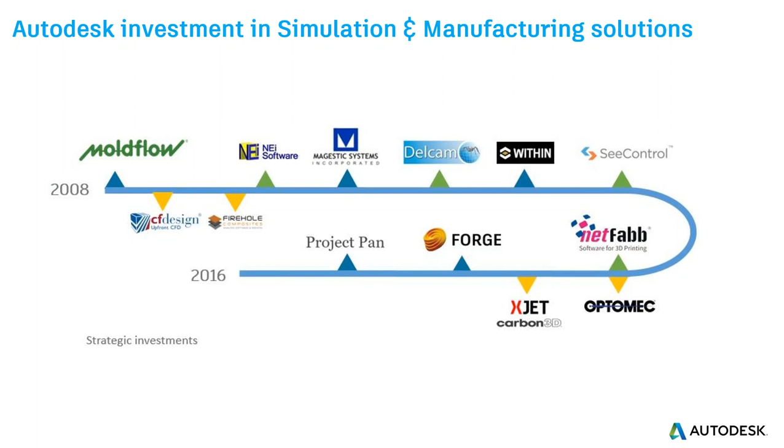Two of the acquisitions, key acquisitions for looking at mold tooling, the injection molding process, are Moldflow and Delcam. Moldflow was established in 1977. It's a key brand name in the injection molding simulation world. And we also have Delcam, one of the world's leading suppliers of advanced CAD/CAM software for the manufacturing industry. They were also founded in 1977 after initial development work at Cambridge University, and they've been growing ever since.

So high volume production can take the form of injection molding for plastics. It's a very competitive area, and there's a lot of pressure on pricing, which can squeeze margins from any project. So differentiation into higher value business to address the needs of complex and more accurate tooling helps to regain a competitive advantage through use of new technologies and increased machine utilization. This is becoming more important for the mold industry as designs become more complex and critical mold tool design questions need to be answered early in the manufacturing process before they become expensive.

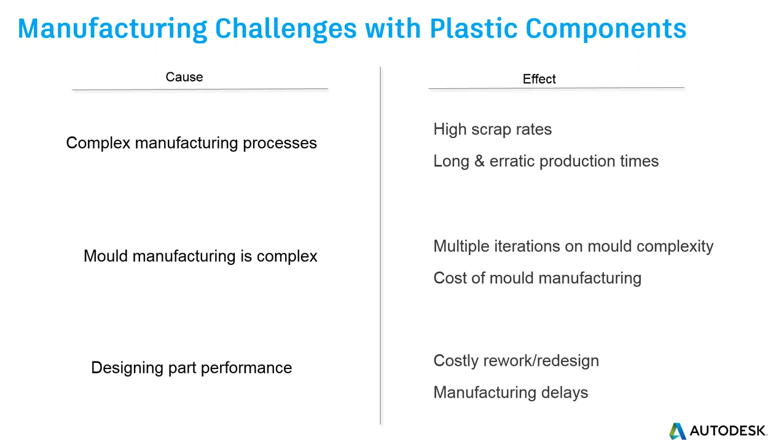If we look at the optimization process, this starts in the design phase, where we can start to optimize part design, mold design, and any changes at this stage are relatively inexpensive, and this helps to keep costs low during the process. So there is no need to validate. Once you get into production, you already know what to expect. You know that things will work first time.

So information can be passed on from design, engineering, prototyping, and manufacture. This means less changes are required. We can identify issues very early on. They can be eliminated at that stage, and there's no need to make major changes downstream.

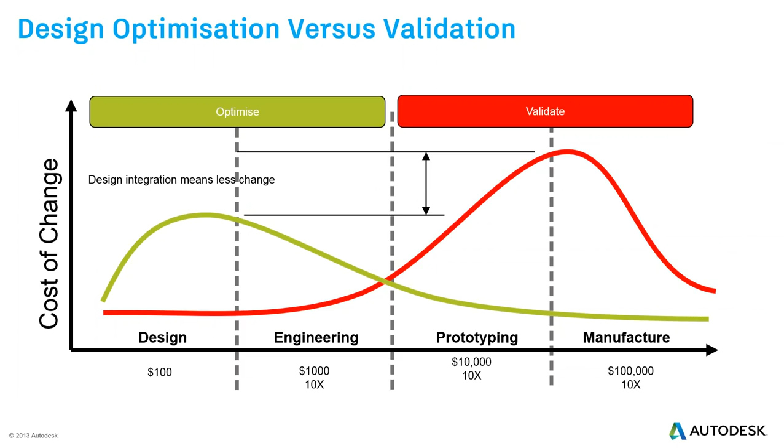So it is a multi-stage development process. We look at the objectives of what we're trying to do at the top and the risks at the bottom. On part design, we want it to be suitable, to be fit. There may be structural requirements, but can we actually make the part? Will it be to the correct size? Once we get into mold design, there's tooling features we can do, such as cavity core design, cooling, ejection, gate and runners.

But how do we know that the cooling design is optimized? It's going to give you uniform mold temperature. Is the feed system design going to give issues? Where should you vent the tool? Once you start cutting the mold, you can define tool paths. But are these optimized tool paths? Are they going to give you the risk of interference?

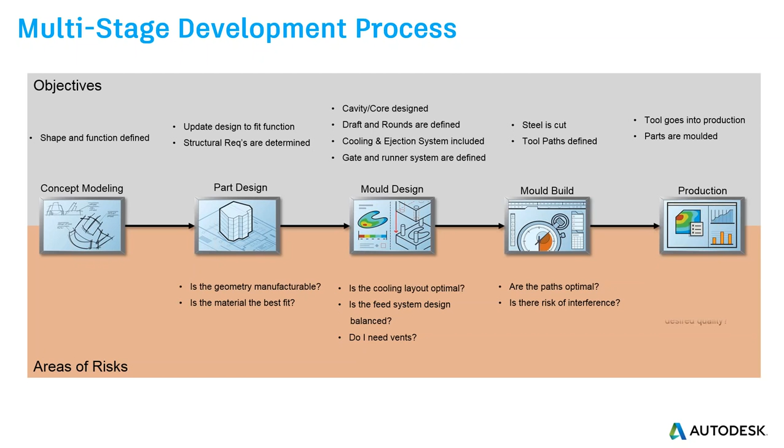Once you go into production, you're molding parts. How do you know the mold will perform? And will the parts be accepted? Will they be of the desired quality?

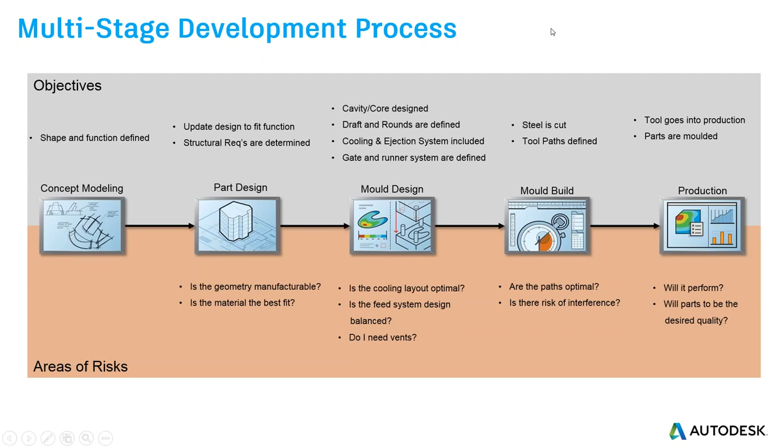So we can look at this another way. We can look at the stages that we typically go through.

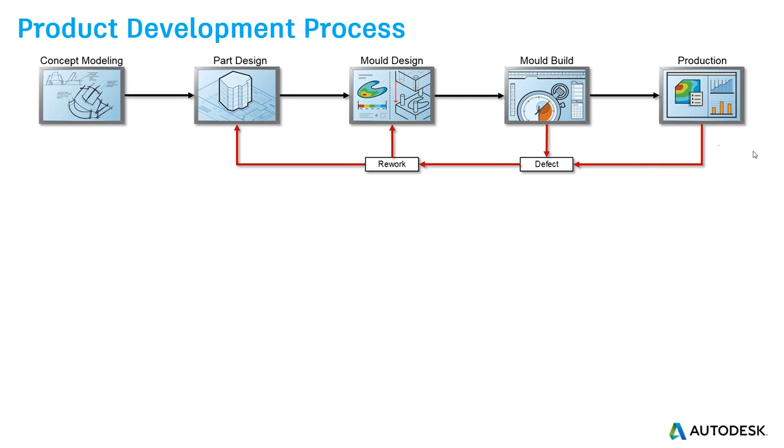And if we find defects while we're building the mold or while we're in production, then it goes back for rework, often involving redesign. It may be that the part has to be redesigned.

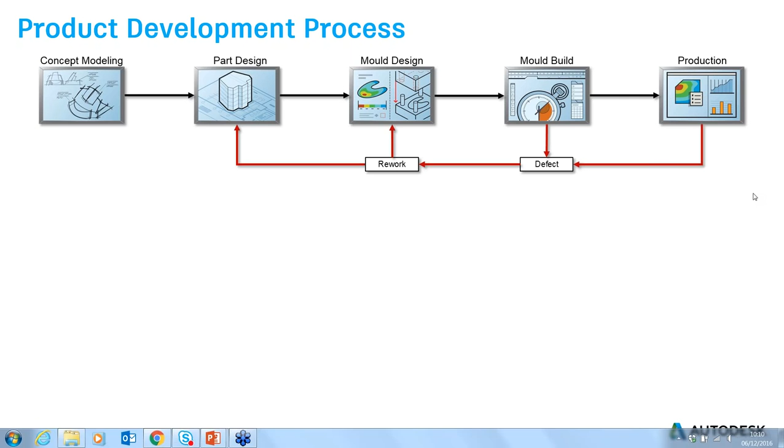So this is the typical process that we see. And as I said before, the costs do increase during this process.

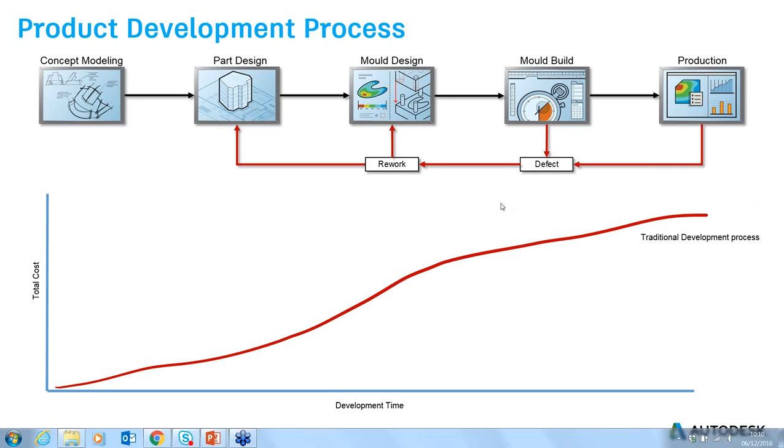If we start to introduce inspection, advanced techniques for making the molds, then we can start to identify defects in the mold that could lead to poor parts being produced very early on. And then we can actually redesign at this stage and rebuild the mold.

So this is the area what we call forensic analysis, where before we go into production we can do some inspection, some forensic analysis. This can save us time compared to finding out these problems when we're in production or trying to get the mold into production.

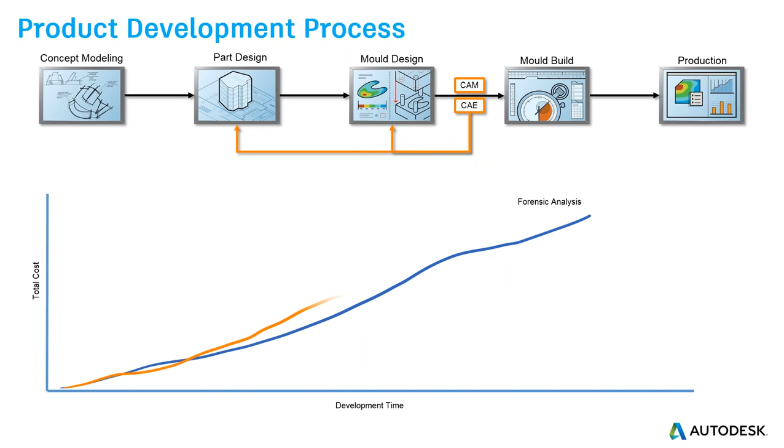We can introduce CAE, simulation for plastics, coupled with mold design using advanced tools. We can start to identify any issues before the mold is built and eliminate them. So we can validate that the mold will perform before it is built, and this saves further time and costs.

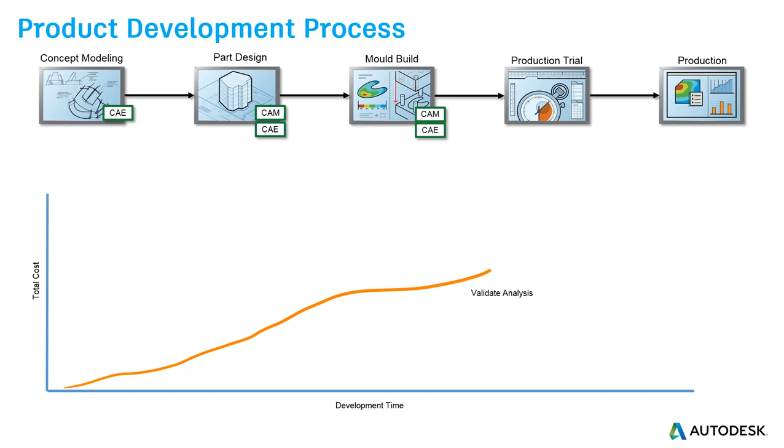If we can start applying these technologies very early on, even at the design concept stage, information can be passed along, verifying wall thickness, material selection, injection points, etc. And this will further reduce the costs and time. And now we're actually optimizing as well, so we're not just checking that the parts can be made to the desired quality.

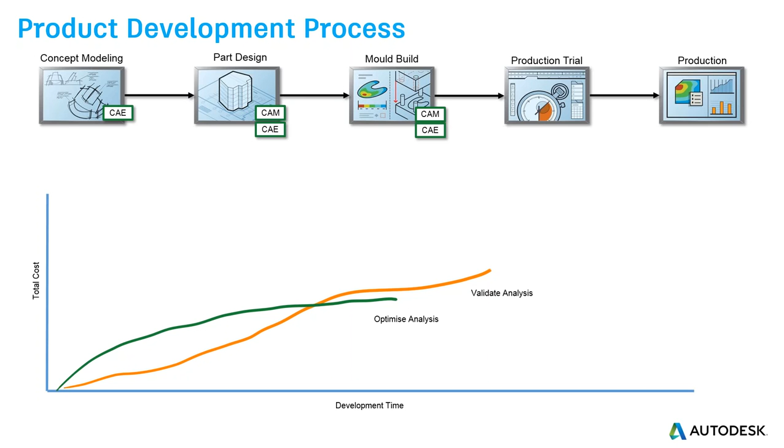We're not troubleshooting, we're optimizing, so we can reduce costs in this way by making the whole process more efficient, making sure we're selecting the right materials, and even reducing material content.

So this has benefits for lower costs, reducing time to market, especially with warranty issues, recalls, and it gives you confidence that the design will be right.

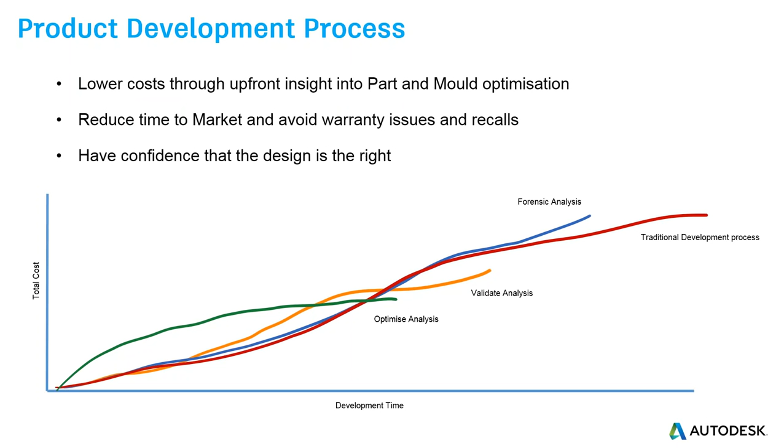So Autodesk can deliver these solutions to help you. It's a single source for part, mold and injection molding process optimization. And it's using the leading plastic injection molding simulation with Moldflow and the leading machining technology with solutions from Delcam.

So we'll begin with looking at Moldflow. So at the part design stage, you could be faced with these challenges as a part designer.

Will the part fill without defects? Where should it be injected to make sure that it fills okay? Will it have surface defects? How do I know that I've chosen the right material for this moulding? Will there be weld lines? Will there be an area of weakness or visibly unwelcome?

Will the part distort after it's been moulded? Will it be to size and shape? And will it perform in service? Will there be any issues because of perhaps high internal stresses?

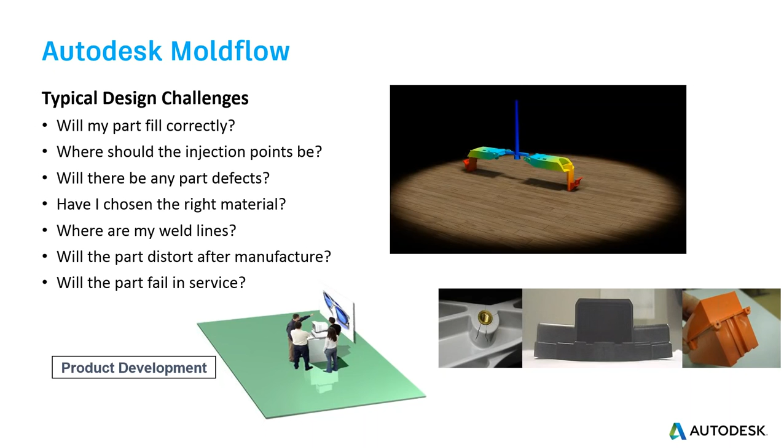And at the tool making, the tool design stage, there's lots of questions. So if you're adding cooling systems, are they in the right place? Are they optimized? And what mold shrinkages should be applied to the mold?

Is the feed system optimized? Is it over-designed? Is it balanced? And what machine can it run on?

What clamp force will be required? Will it be easy to mold? What will the cycle time be? Can that be reduced? If you've got other production tools, can they be reused again?

We want to know the mold's going to run first time. We don't really want the production guy to be trying to troubleshoot any issues to try and get the part in production.

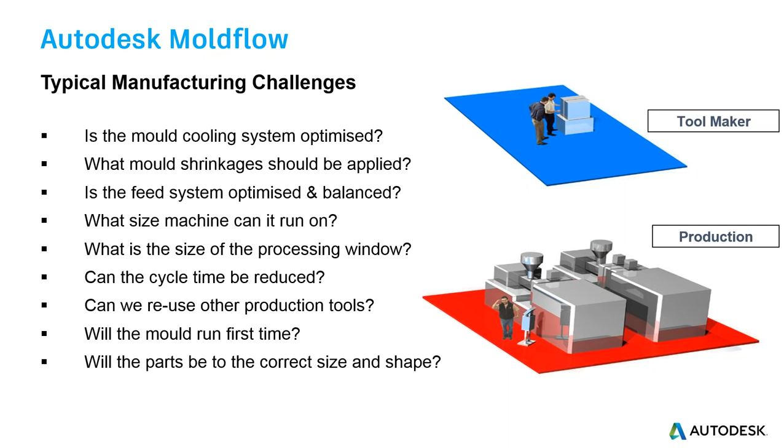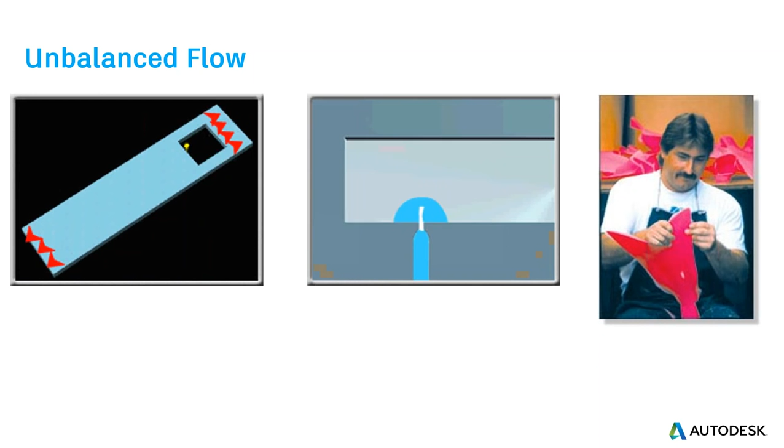So if we start with some of the basics, one of the main issues of poor product quality can be that of unbalanced flow in the cavity. This means that some areas are filling before others, and while they're still filling other areas, these areas can become overpacked. They will shrink less. Lower shrinkage will mean different dimensions, and also it can induce warpage in the component. It can also increase clamp force, and the mold may actually open and flash.

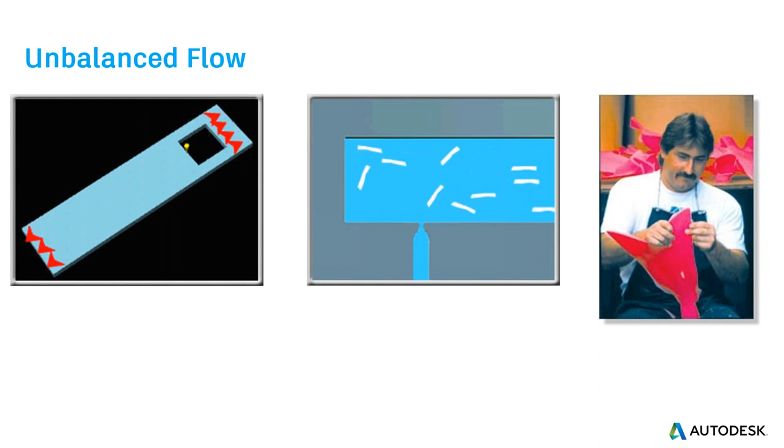And we still see people sitting by machines trimming off flash. And this isn't always due to mold wear. It can be because of this unbalance where the mold is open locally to let material out.

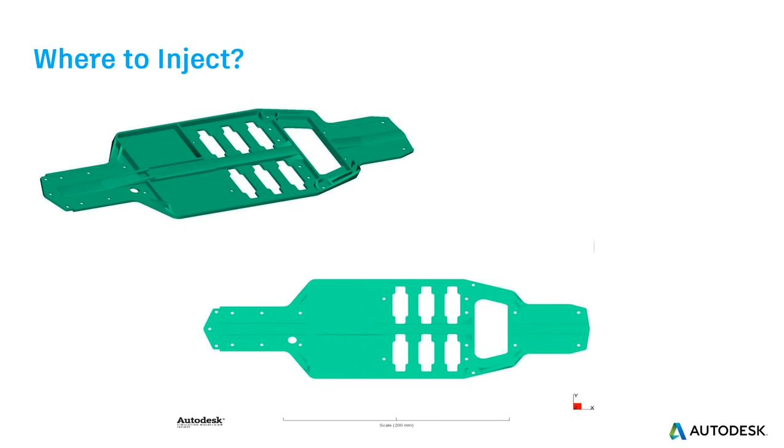So Moldflow can help answer some of the basic questions of where to inject. If you've got this component here, we allow one injection point. Where would it go? There's recesses to the right. There's a lot of material to the left. Would it go in the middle, to the right, or to the left? And Moldflow can show you the best place to inject for flow.

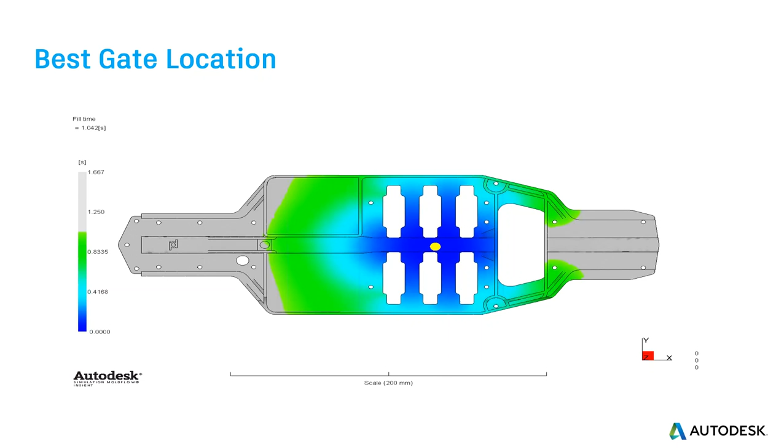This has benefits for minimizing stresses in the component. It will reduce shrinkage variation. It keeps shrinkage under control. It can eliminate part warpage. It keeps clamp force to a minimum. And in turn, that can help with mold life.

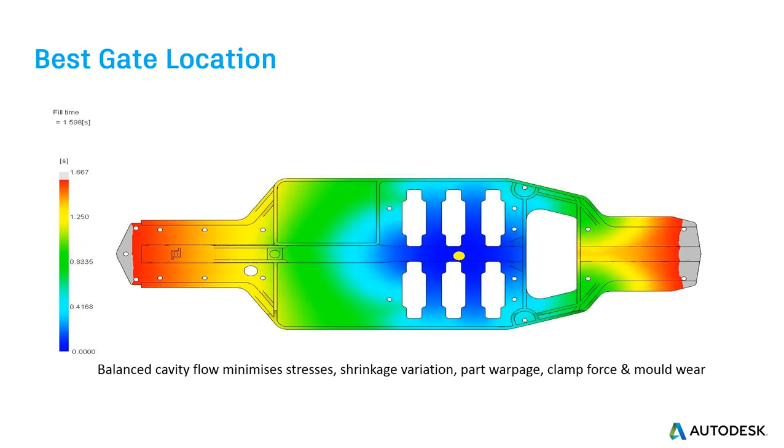With the feed system design, the same principles apply here. Is it balanced? Is it going to deliver material into the cavity so that it fills uniformly? The software is capable of resizing runners automatically to make sure cavities fill at the same time. It will allow you to look at the size of gates to make sure they're not over shearing the material, degrading it, or changing the colour of the material. So again, this can eliminate flash, reduce clamp force, and increase mould life.

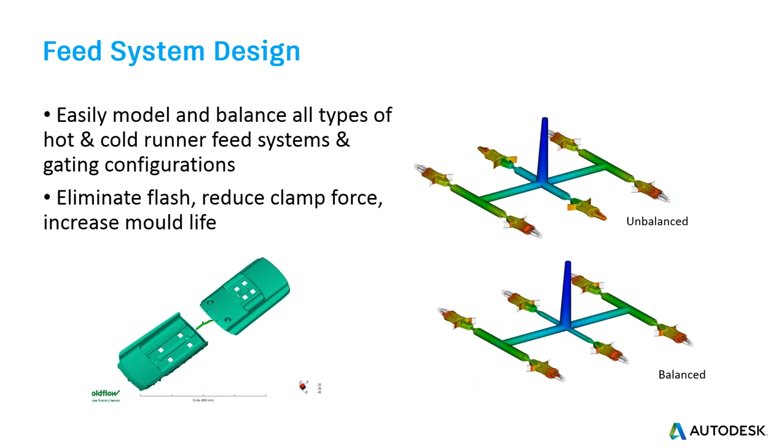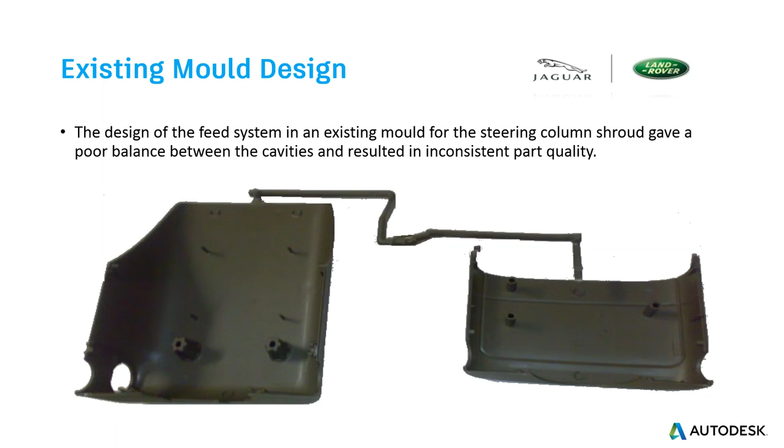One of our customers, Jaguar Land Rover, had a 1+1 tool, and this gave problems during injection moulding. It's a poor balance between the cavities, and it resulted in inconsistent part quality. They couldn't get the sizes quite right for both of them.

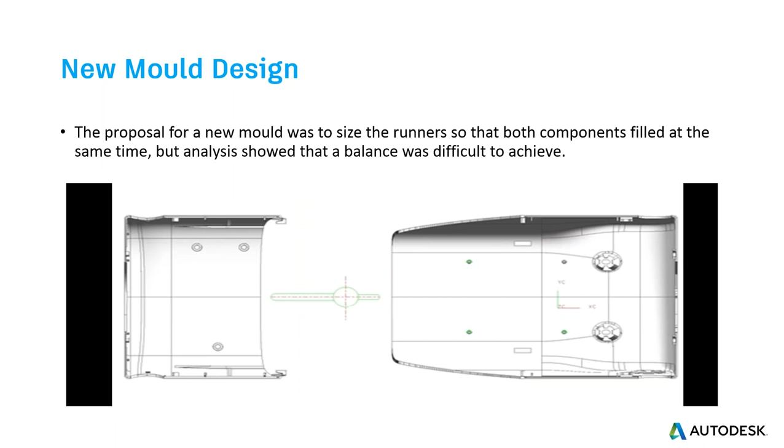So they looked at resizing the runners, but it was difficult to achieve with the existing runner design. The only balance that could be achieved was with an S-shaped runner, which actually gave a longer length to balance on. That was very successful, and that gave them some savings just on that one tool.

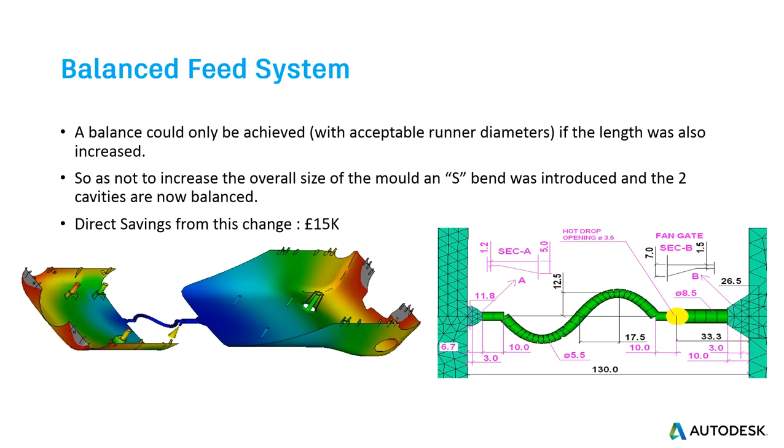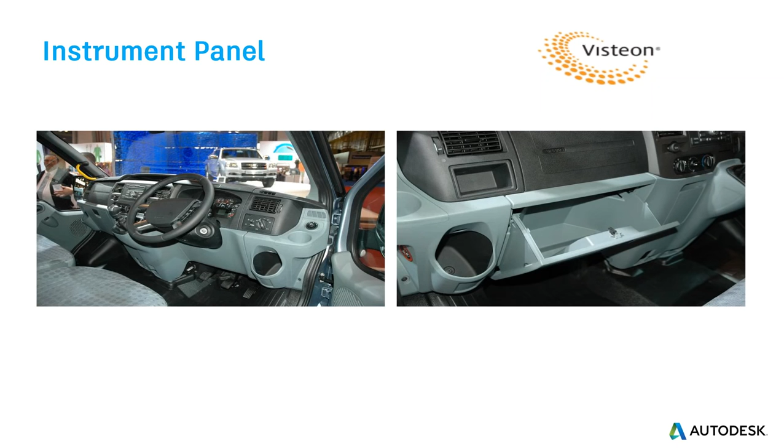We go to another level. This is from Visteon. They partner with many companies for the design and manufacture of components. Looking at the instrument panel here. Initially this is going to be 2 molds: one mold for a demister component and the main panel.

Moldflow showed that it could be molded in one piece, in one mold. It would mean a witness mark from a valve gate being visible, but that was accepted because it could be covered by a hinged tray feature.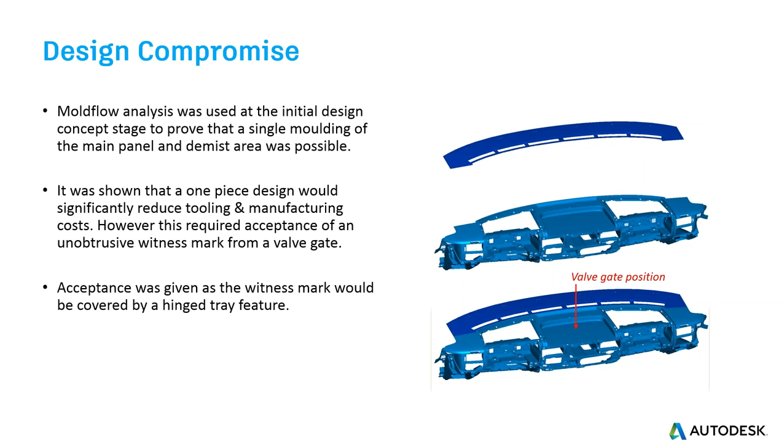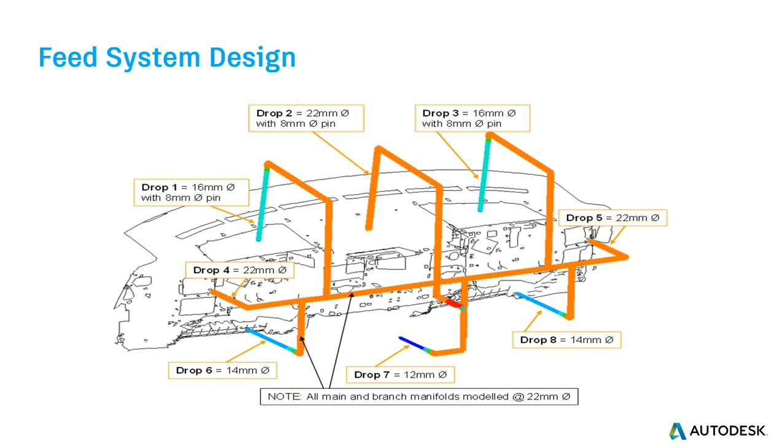With Moldflow, they were able to establish best injection positions and feed system design with hot runners being used in this case, making sure that the fill was nicely balanced. You can see the fill pattern here. This was very successful. Weld lines were moved to less critical regions by placement of the gates. Wall thickness variation will do that as well.

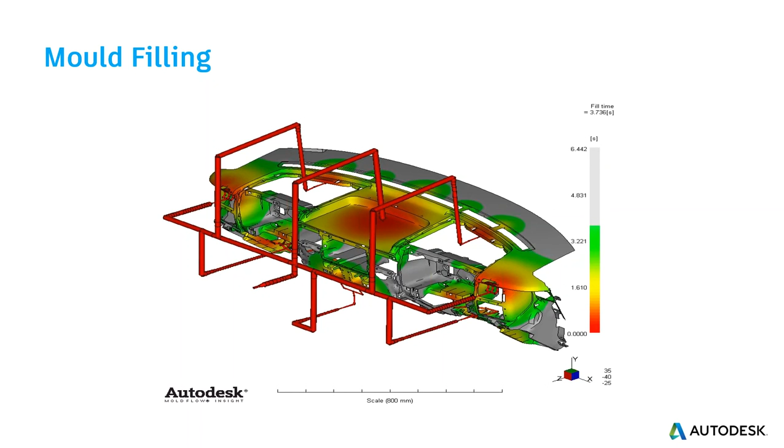Moldflow can also look at the details of hot runners, so detailed modelling of these can be achieved. This helps you to see where the heat from such hot runner systems will go, will actually get to the cavities, making them longer to cool, making them hotter on one side. And are they insulated correctly? Moldflow will show the heat dissipation and allow you to make sure that your hot runner won't have any adverse effects on the process.

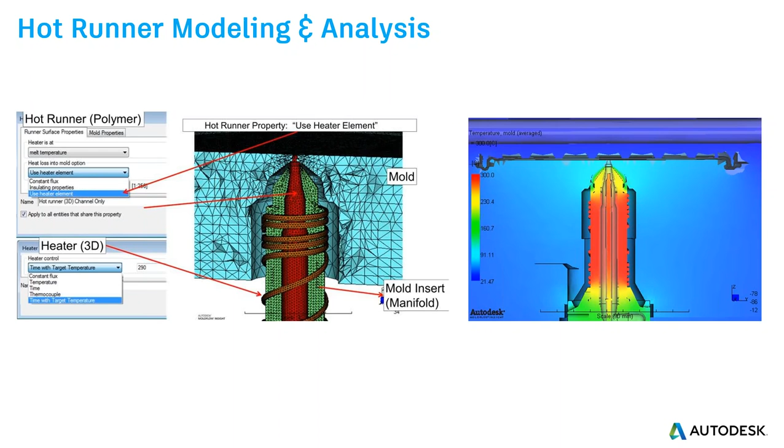Our customers are using Moldflow in various ways. Haidlmair is a company that makes large volume molds. In this case, a big recycling container. They're using Moldflow to actually reduce the weight of the mold. A lot of the weight's often in the fixed half. By making sure they have the right injection positions, they can keep injection pressures low, stresses low, and they're able to redesign their molds not to have so much material. They can reduce clamp force in this way, so the stress on the mold is not so significant. This also has benefits for reducing the energy of the injection molding machine.

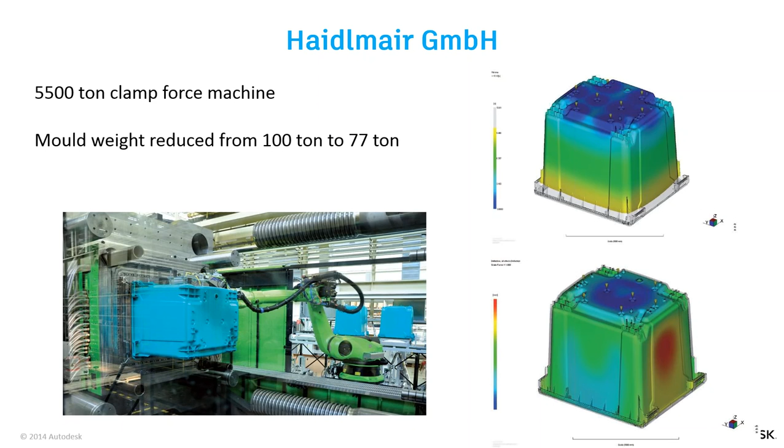There's also mold cooling to consider. How is the mold being cooled? You need to take heat away from the hot plastic coming in. So Moldflow can show you where to best position cooling lines, and shows you the effect of cooling line position on removing heat. This can be steady state or transient.

You can interrogate results through the mold blocks, look at the effect of different mold block materials, see how many cycles are required to get the mold to a steady temperature, and look at the temperature variation within each cycle.

The cooling lines can be imported or added within the system. This is an area that's often neglected, because if you have differences in mold temperature from one side to the other, that can promote bowing of the component. It can affect final size.

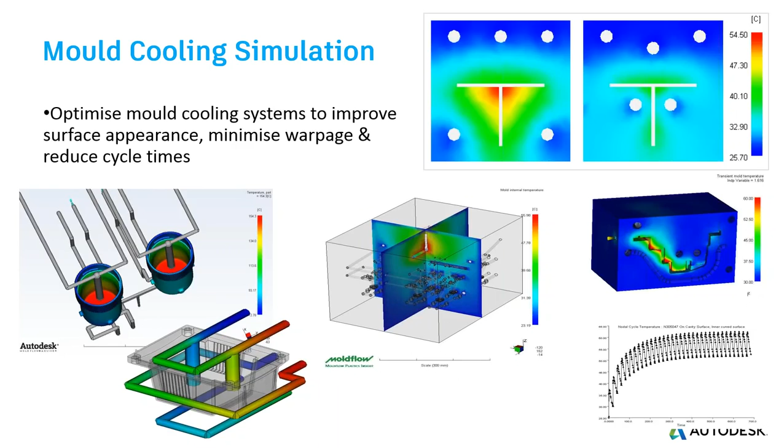One such company, CooperVision, was already running a high cycling mold. They're running at 11.2 seconds. They wanted to get this down to 8 seconds. This would have a significant effect on output.

Using Moldflow, they were able to pay attention to the mold cooling, and they got cycle time down to 8 seconds. These molds run for 24 hours, 7 days a week, for 3 years. So the quality has to be good, making sure that the modified cooling doesn't adversely affect the components in terms of size and the way it fills.

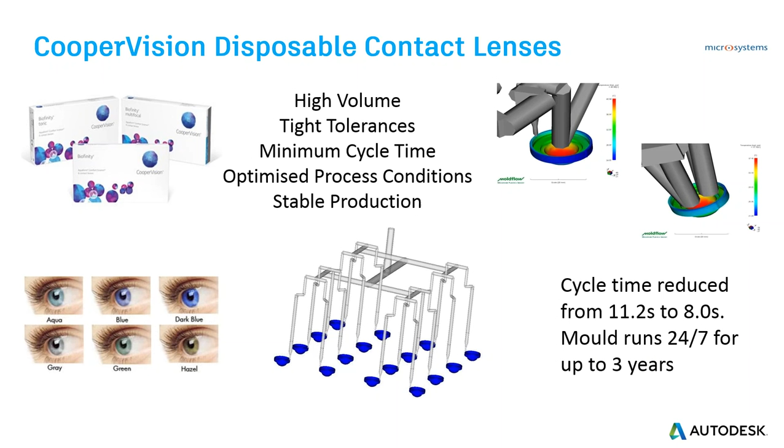Certainly we don't want to be seeing molds being used as cooling jigs. Often parts can be kept in the mold for a bit longer to try and keep them to shape. But invariably the stresses will relieve themselves and you still end up with a warped molding.

So rather than use the mold to try and eliminate warpage issues, Moldflow will show the cause of the warpage and allow you to eliminate it, preferably at the design stage, by paying attention to wall thickness variation, gate position, and processing conditions.

Okay, now we start to look at the manufacture of the mold, and there's many challenges here. There's the challenge of how do we actually make a large or complex mold. It won't be easy. How do we prepare for this?

Can we read in surface, solid, wireframe and mesh from any CAD system? How can we eliminate errors that can cost us? You've got multi-axis machines. How can we improve the efficiency of these? There's always pressures to improve the surface quality and accuracy of molds.

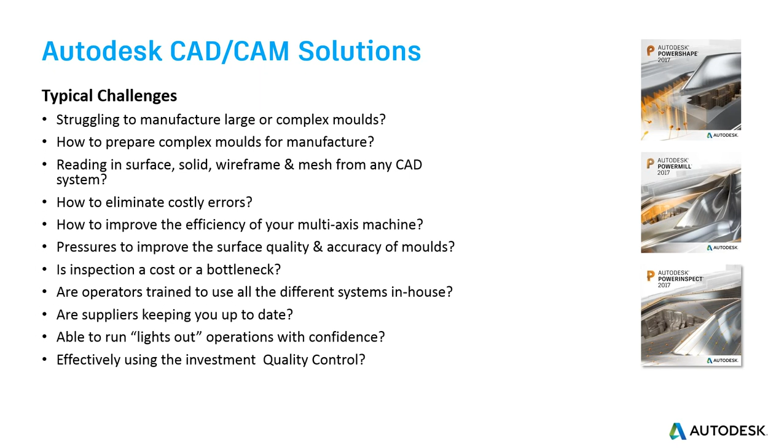And are you finding that inspection is a cost or a bottleneck in your company? You may have different systems for making molds, for measuring molds, but are your operators trained to use all the different systems in-house? And are the suppliers keeping you up to date? Are you able to run lights-out operations, mold manufacture and inspection with confidence? You may have invested heavily in quality control, but is that investment being effectively used?

So there are CAD/CAM solutions that we can turn to.

And this is PowerShape. So this is creating molds and dies and modeling for manufacture. This is where it excels. It allows you to create complex 3D geometry that you need to control your multi-axis or high-speed machine tools.

It operates on 3D data regardless of which system created it. It doesn't matter which format it is in. It can be solids, surfaces, wireframes, and even meshes.

Once imported, intelligent analysis tools automatically detect and repair critical faults that could complicate downstream processes. And unlike many CAD systems, PowerShape doesn't insist on you having to fully repair your solid before you can do further work. There's many commands, including direct modeling tools, which will still work even on faulty solids.

So when creating cavities and cores and slides from a 3D part, PowerShape will guide you through an easy-to-use wizard. In most cases, the shut-offs and split faces are created fully automatically, leaving you minimum work to do to finish the mold.

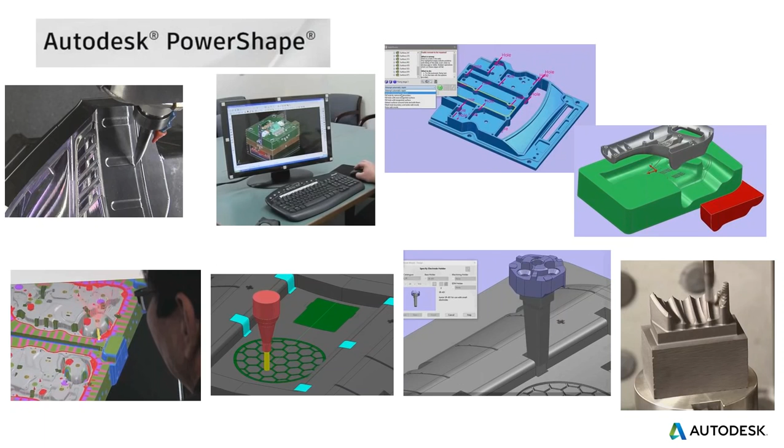Also have PowerMill. So many of the world's successful manufacturers grow their business by making increasingly complex parts faster and more accurate than their competitors. So to help achieve this, they invest in more modern capable machine tools, such as high-speed multi-axis machine tools capable of milling and turning, able to cut complex parts in only one or two setups.

However, the full potential of these machine tools cannot be realized without equally advanced CAM software. So this is where PowerMill comes in. It has the flexibility to work on solids, surfaces, wireframes and STL meshes imported from any CAD system.

It contains a comprehensive selection of 5-axis toolpath strategies, each able to drive a wide variety of tools, including specialized cutters such as lollipop and barrel tools.

And with PowerMill, your parts are machined how you want to machine it rather than how your CAM software wants to machine it. It excels at toolpath optimization, and they can be trimmed and reordered to suit your needs.

For good surface finish, PowerMill allows you to modify entry and exit moves, cut directions, and many other machining attributes, all without costly and time-consuming recalculation.

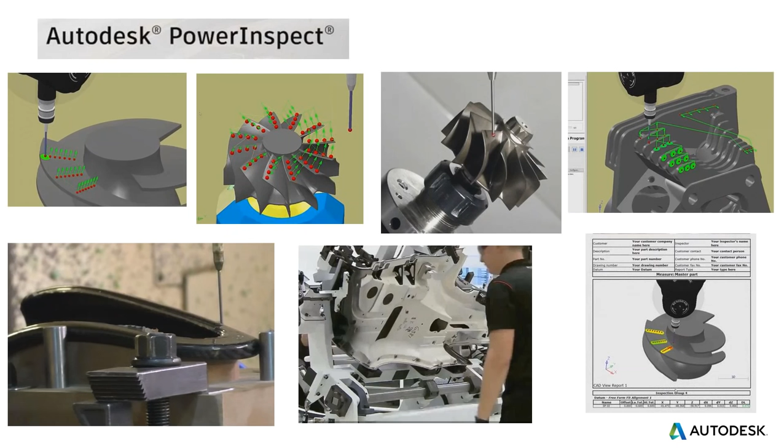We have some customers. There are many customers, I haven't got all the time to go through all of them, but one such company is WHS Plastics. They're a tool maker for automotive. They do injection molding, with 100 injection molding machines. They have machine tools and spark eroders. They operate over 2 sites.

So they have products such as PowerMill and PowerShape for their tooling strategies, and this allows them to directly address time to market. They do collision checking and simulation, so they can run at full speed, lights out, and this helps also to address the time to market while controlling the quality. This company achieved a 20% greater throughput from the existing machines in the first 3 months of use.

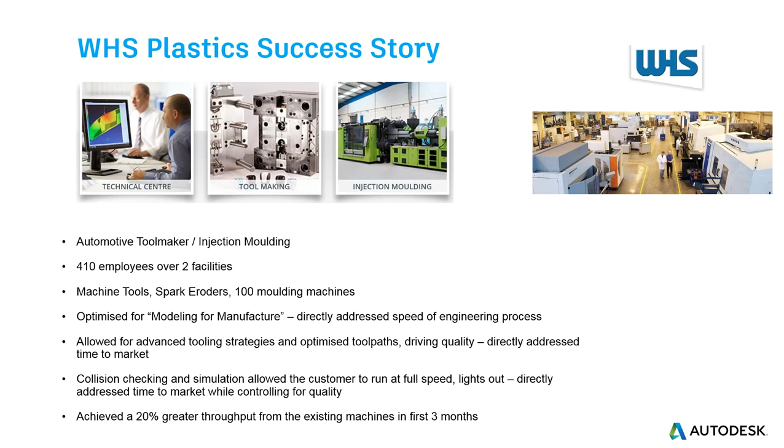Many other companies: Avenue Mould Solutions in Ireland make precision moulds mainly for the medical industry. They perform injection moulding, based in Ireland. Apart from having products such as PowerMill, PowerShape, PowerInspect, they also use Moldflow to optimize the mould design and the part design before mould construction takes place.

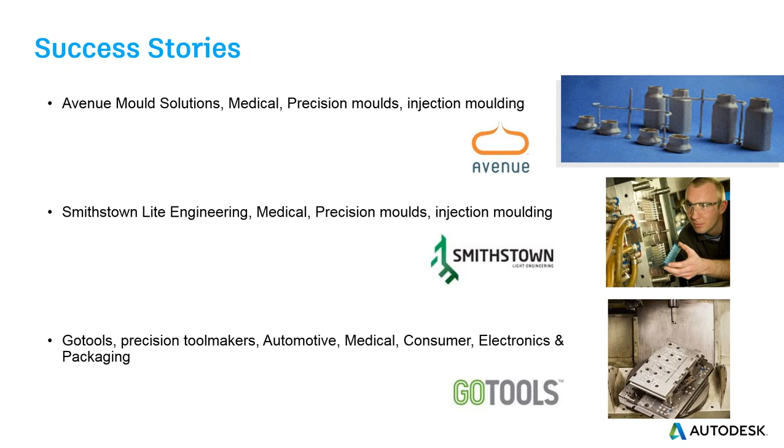Smithstown Light Engineering, also in Ireland, also make precision moulds for the medical industry and perform injection moulding. Go Tools, precision tool makers based in Yorkshire, make moulds for automotive, medical, consumer electronics and packaging. Some examples there.

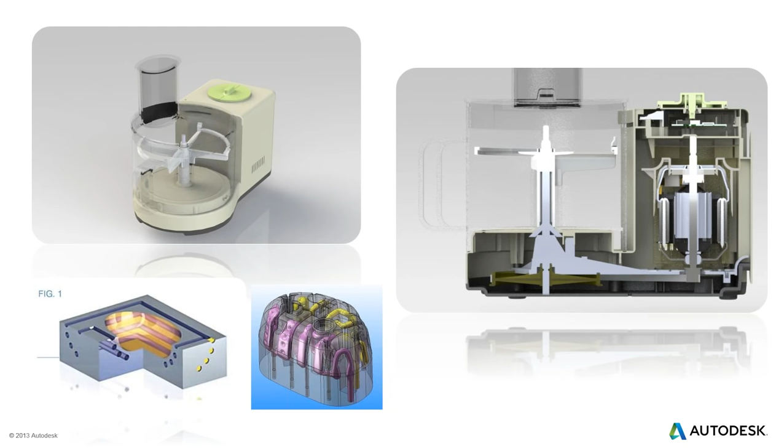So what else do we have that can help with tooling? Well, if we look at the traditional way of cooling moulds with simply straight drillings, water lines, many companies are now considering using conformal cooling. These can be cooling channels or cooling blocks that follow the contours of the part, giving more uniform and efficient cooling. So if we take this blender for example,

We can use Moldflow to simulate how the component will fill, making sure there's no adverse effects on part quality.

Moldflow can also perform conformal cooling analysis, looking at how the cooling lines perform. In this case, these aren't simple drillings, these are more complex cooling lines designed to remove heat from the component effectively, inside and out. Moldflow can predict the temperature of the plastic and the temperature distribution required, working out the heat load that the cooling lines have to handle.

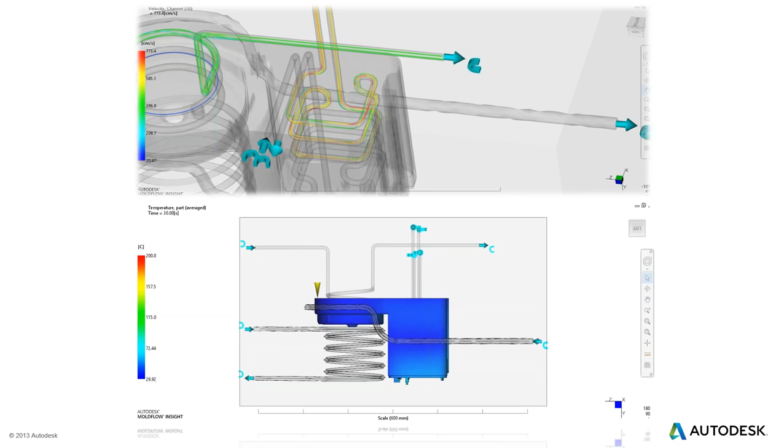You can also use the pressures inside the cooling lines and the pressures inside the cavity from the injection moulding process to look at the stresses in a conventional mould. Which area is actually absorbing the stress?

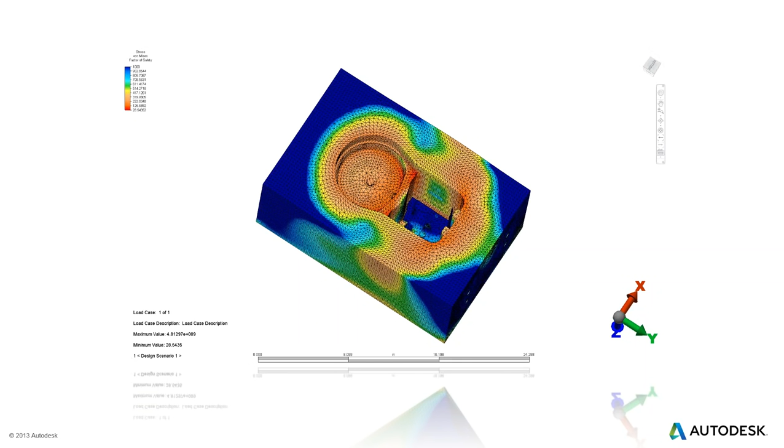We can then go on to perform an analysis where we can come up with a new structure. In this case we've seen a lattice structure which is designed to absorb those stresses and forces from the cooling lines and the injection melt. This offers a great reduction in mould volume and mould weight.

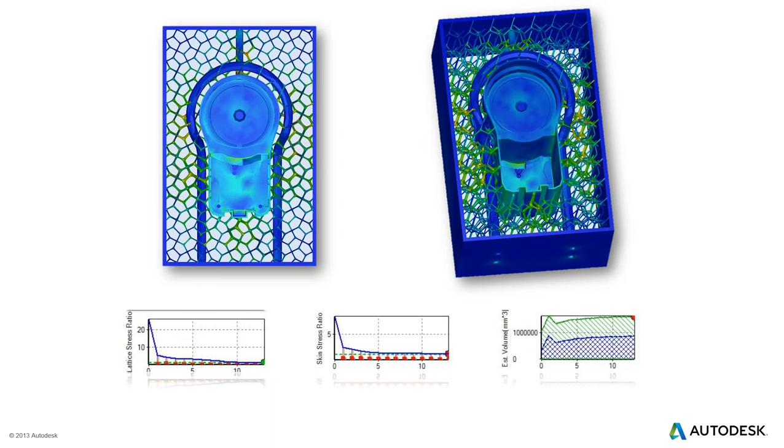So we end up with a lattice structure. This cannot be made by normal means, it would have to be made by such processes as additive manufacturing. We can then build the bolster around this.

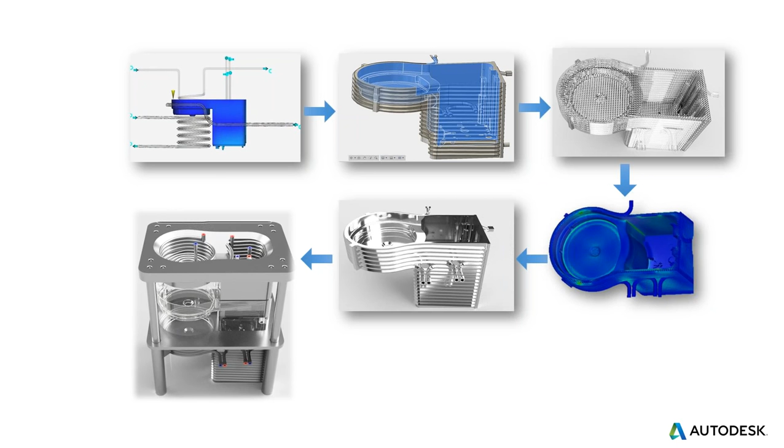So we can go from initial simulation of conformal cooling, identify where these cooling lines should be, design a mould to support this, evaluate the stresses and loads in the system, and further redesign the mould to be supported. We end up with a mould that can be 45% reduced in volume compared to the conventional mould, and also offers a 10% reduction in cycle time.

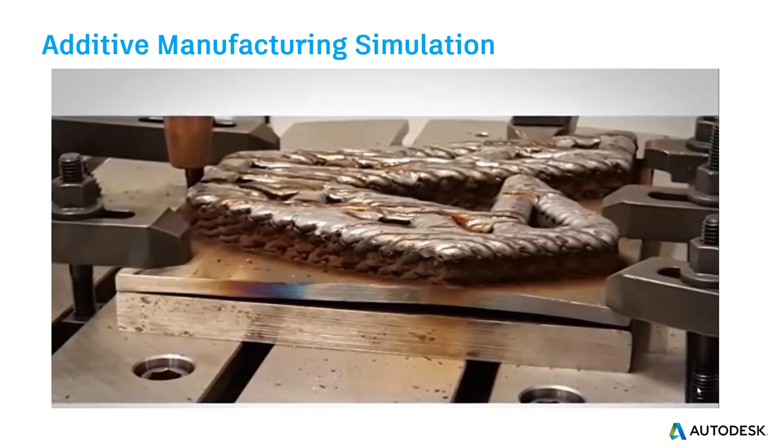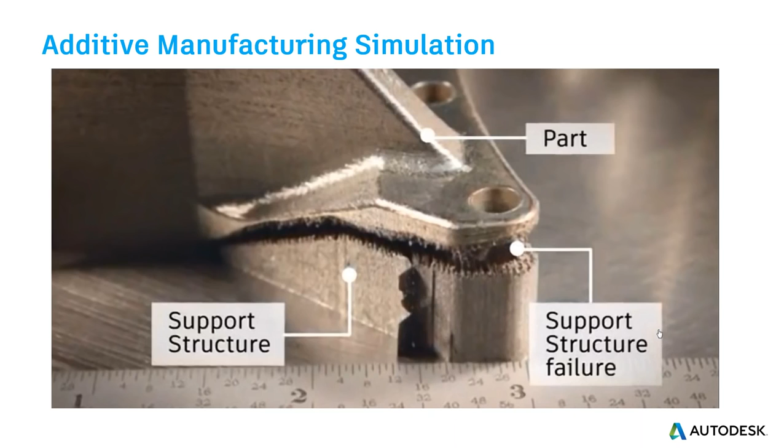So that mould will have to be made by additive manufacturing, and this is another area where Autodesk can excel and lead in simulation. A lot of structures and components can be made by additive manufacturing, 3D printing, whether they're plastics or metals. But this process does not come without its own issues.

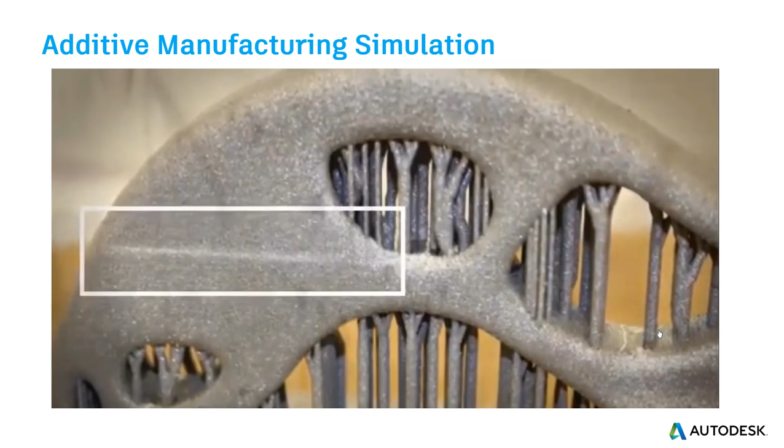You're heating metal, you're melting it, it's cooling down, and this can give rise to thermal stresses which can cause cracking. Also, you need to support such structures while you're building them, and the supports can also fail. So with such products from within and Netfabb from Autodesk, you can help to optimize this process.

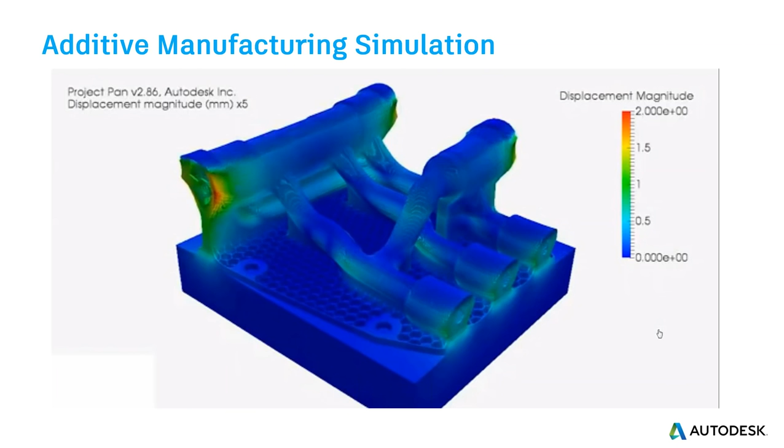It can simulate how the build is performed, temperature distributions, stresses, and also can predict deflection or displacement of the final product. Will it be to the size you want due to distortion, due to thermal stresses? It's best to know this up front because such processes can take many hours or days to complete.

We're also looking at Moldflow ejection force, which is in development at the moment. This will use our embedded Nastran solvers in our structural analysis programs, and it can look at the ejection forces required to remove a component.

It can also help you place your ejector pins and size them without giving these visible stress marks that we often see on components, which can be distorted or stressed during the ejection process.

We're also looking at predicting mold life. If you consider that a mold goes through a lot of stress cycling, it's got hot plastic coming in which is then cooled, and high pressure melt coming in, and that pressure dissipates.

And you've got mold clamping forces around the mold. These can all induce stresses in the mold.

Using a fatigue analysis, again from our Nastran solver, we can predict fatigue, predict mold life, identify which parts of the mold will fail first, and also identify the cause of this failure. Is it thermal, pressure, or clamping force-induced stresses?

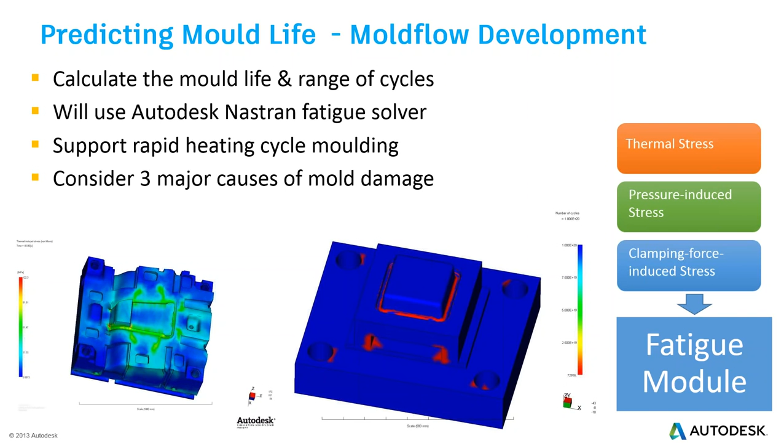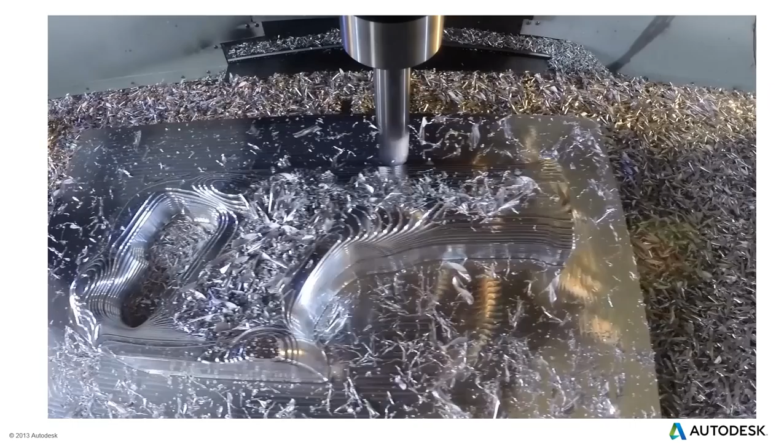Okay, so I'd just like to summarize, put some things together, summarize what we have seen today. We're looking at complex tooling. We need to get costs down to be competitive, so we need to be more efficient.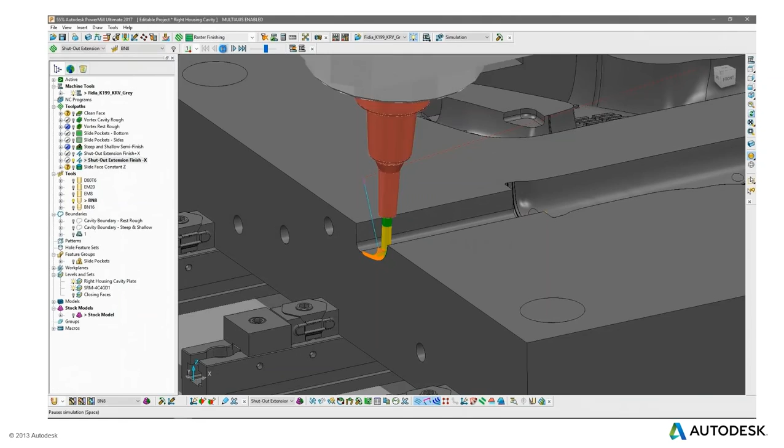And parts are becoming more complex. We need to make critical decisions very early on. So we can use the combination of Moldflow and the CAD/CAM solutions to help drive this.

So we can begin with Moldflow to evaluate best gate positions. Can the part be filled defect-free? Will there be weld lines, air traps?

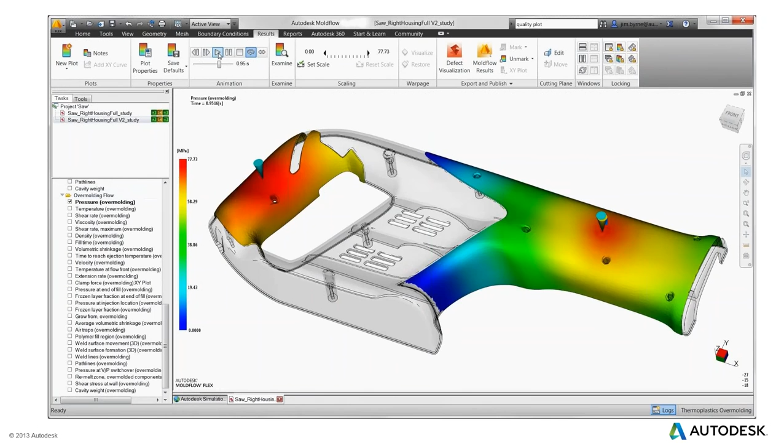Can we eliminate distortion? We can look at conventional injection molding, two-shot, insert over molding, and other processes as well. But we need to make sure the part is manufacturable at this stage.

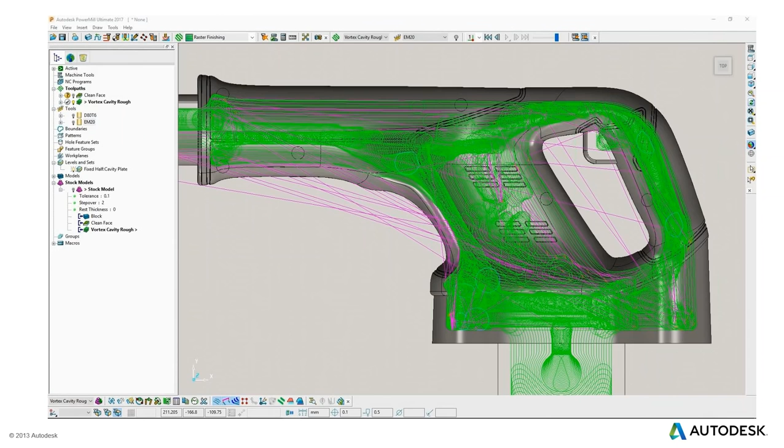Once tool design is completed and ready for manufacture, focus turns to improving quality, accuracy, repeatability and finish of the machining process. High efficiency tool paths, both in terms of calculation and cut time, are important to minimize project lead times.

Minimizing tool lengths to reduce vibration and improve surface finish can be achieved by using the full capability of multi-axis machines.

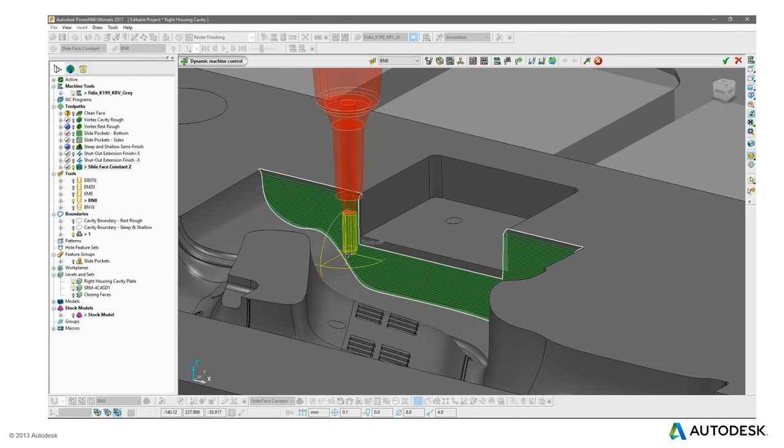Tool axis decisions can be made prior to calculation or quickly applied afterwards, fine-tuning the output desired for the machine.

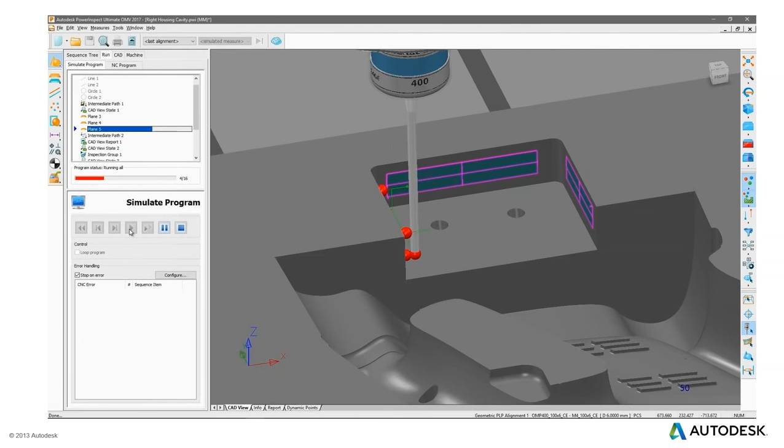Simulation and verification before machining can reduce downtime, providing confidence for unattended production. Taking a right-first-time approach means making sure the material is loaded in the right position prior to machining. Automated part alignment means a quicker, accurate and consistent setup.

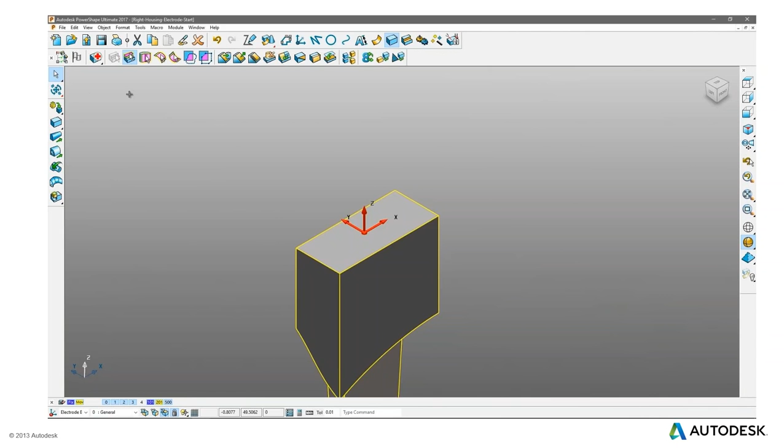Part verification while the component is still on the machine can be used to check the accuracy. For finer details, electrodes can be used to finish areas of the tool that cannot be machined by conventional means.

Electrodes can be extracted directly from the model, machined and inspected, as well as being positioned accurately in the EDM machine itself, all with an automated workflow.

So what we've seen: PowerShape for mold tool creation, Moldflow for molding simulation and analysis, PowerMill for toolpath creation and machining, and PowerInspect for inspection.

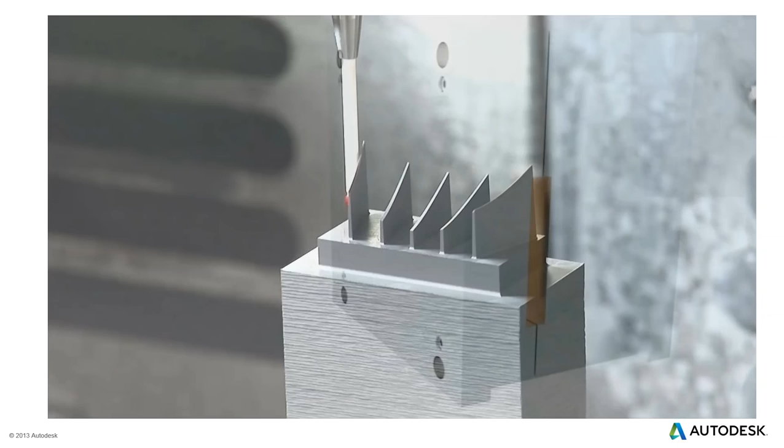Also looked at Electrode, which combines PowerShape, PowerMill and PowerInspect to provide a closed loop system between electrode design, manufacture and metrology. And all of this to deliver high value tooling.

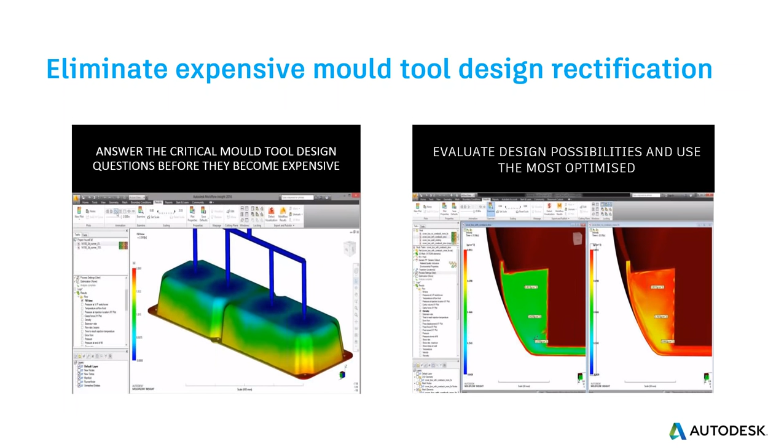So Moldflow to answer critical mold tool design questions before they become expensive. Evaluate different design possibilities before the mold is built.

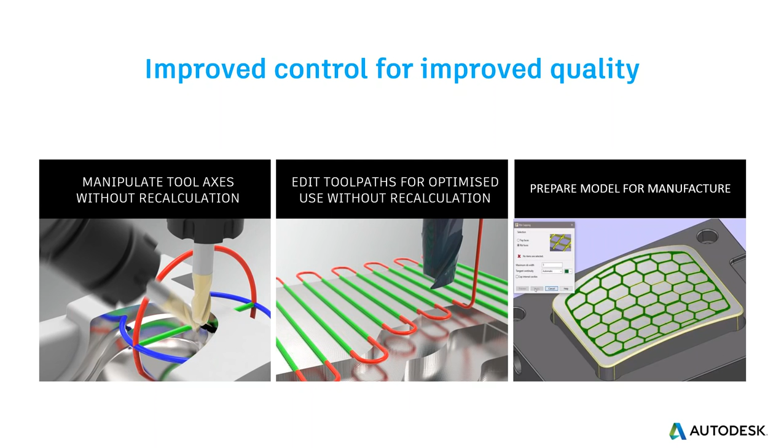Looking at products like PowerShape for optimum tool path creation without recalculation, and preparing your models for manufacture.

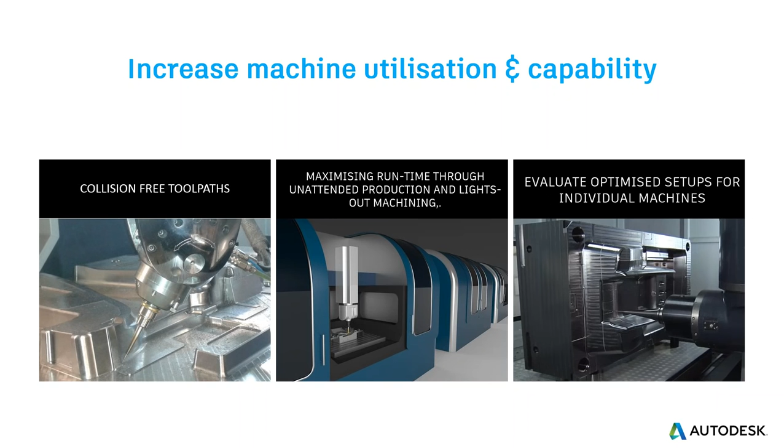Products and solutions like PowerMill, making sure we've got collision-free tool paths, making sure we can run unattended production with confidence, and evaluate and optimize setups for different machines you may have on your premises.

Okay, so the takeaway that we have for you is that Autodesk solutions provide the capabilities to thrive in the future of making things. It helps you keep pace with the way things are being manufactured.

We need to be more efficient as parts become more complex, and using the solutions I've been showing today gives you that ability. The bottom line is for you to win higher value business in the tooling industry using the unique breadth of solutions from a single vendor.

Okay, so I'm at the point where I can take questions. I've helped you. Hope you have found that very useful.